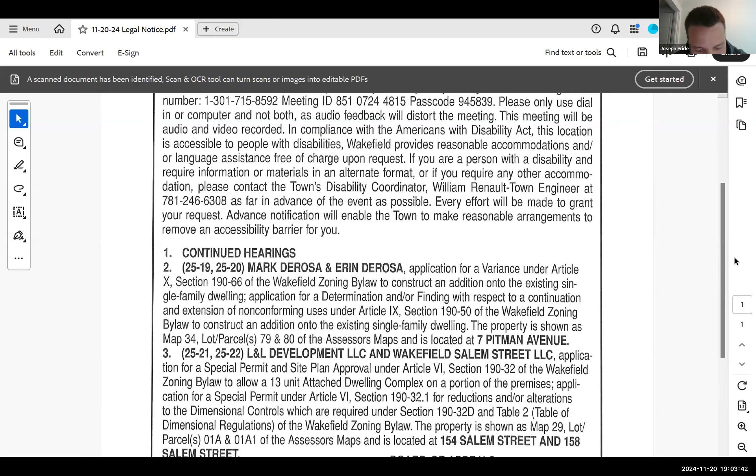Continued hearings. Case 25-19, 25-20, Mark DeRosa and Erin DeRosa. Application for a variance under Article 10, Section 190-66 of the Wakefield zoning bylaw to construct an addition onto an existing single-family dwelling. Application for a determination and or finding with respect to a continuation and extension of non-conforming uses under Article 9, Section 190-50 of the Wakefield zoning bylaw to construct an addition onto an existing single-family dwelling. The property is shown as map 34, lot parcels 79 and 80 of the assessors map, and is located at 7 Pitman Avenue.

Case 25-21, 25-22, L&L Development LLC and Wakefield Salem Street LLC. Application for a special permit and site plan approval under Article 6, Section 190-32 of the Wakefield zoning bylaw to allow a 13-unit attached dwelling complex on a portion of the premises. Application for a special permit under Article 6, Section 190-32.1 for reductions and or alterations to the dimensional controls which are required under Section 190-32D and Table 2, Table of Dimensional Regulations of the Wakefield zoning bylaw. The property is shown as map 29, lot parcels 01A and 01A1 of the assessors map, and is located at 154 Salem Street and 158 Salem Street. Board of Appeals.

Thank you, Joe. As is our custom, we have a continuation in a matter that's also going to be matter under other matters that's not moving forward tonight. Going to read this into the record: a letter dated today, November 20th, from Attorney Brian McGrail, relative to the case at 7 Pitman Ave, case number 2519 and 2520.

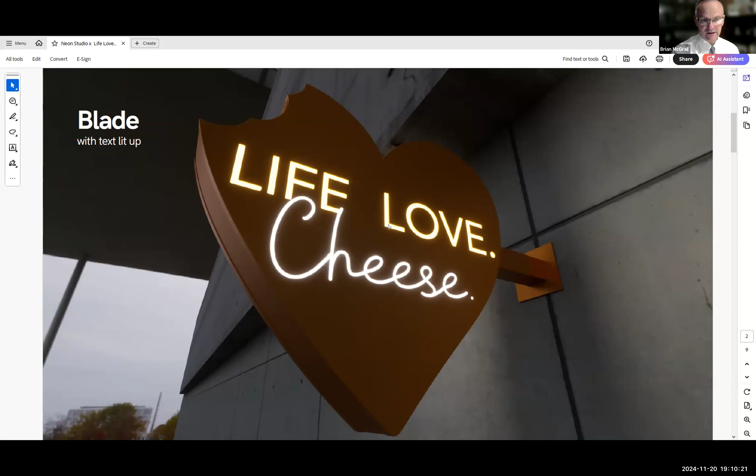The first item we're looking for on the building facade facing Water Street is a bracket sign that would light up. You can see it's got a bite out of the cheese, really unique. Because people go by at a decent rate, instead of just seeing it on the side of the building, having it on the front would allow them to identify and see it if they're looking for this. We'll get into the size as we go on - it's relatively small, only 14 inches tall by 16 inches wide. The sign itself doesn't light up, but the letters do. Savario can show a little bit once I'm done where that would be located, so if you could just place that as a placeholder until we get to that.

This building, if you recall, has two frontages - Melvin Street and Water Street. So under our sign bylaw, it's entitled to have an accessory building sign on each street. When the board approved the project initially, you approved the gooseneck lighting which is already there, so this really fits in nicely. What's being proposed is a simple, straightforward sign, relatively small - only 8.4 inches tall individual letters, and 9 feet long. This will go on the Water Street side and the Melvin Street side with the gooseneck lighting.

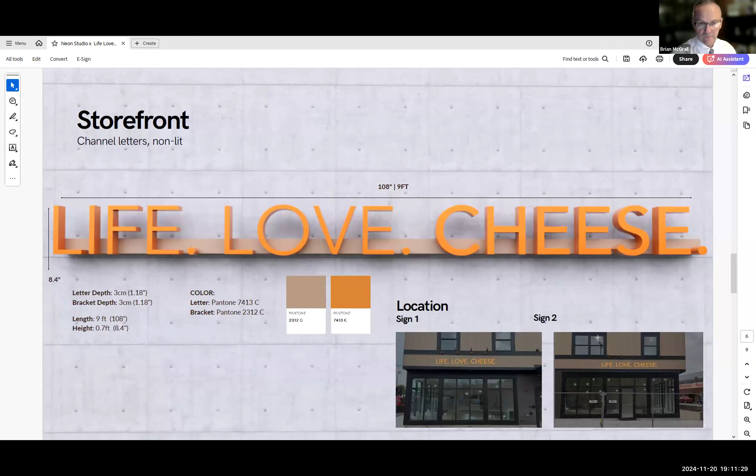Brian, can you remind us how big the sign band is? How deep? Savario, can you unmute? So we actually provided the dimension of it - keep in mind it's not a traditional sign band.

What we've basically done is lined up goosenecks. So this sign is scaled based on the width available from the goosenecks and the light spread of those gooseneck units.

But what is it, Savario, from the brown underneath the window to the brown underneath the sign? You want height, is what you're looking for? Pull up your dimension - your letters are 8.4 inches, yet it's filling most of that space, which is fine. I just want to know what that is. Is that an accurate depiction? It should be, yeah, it should be.

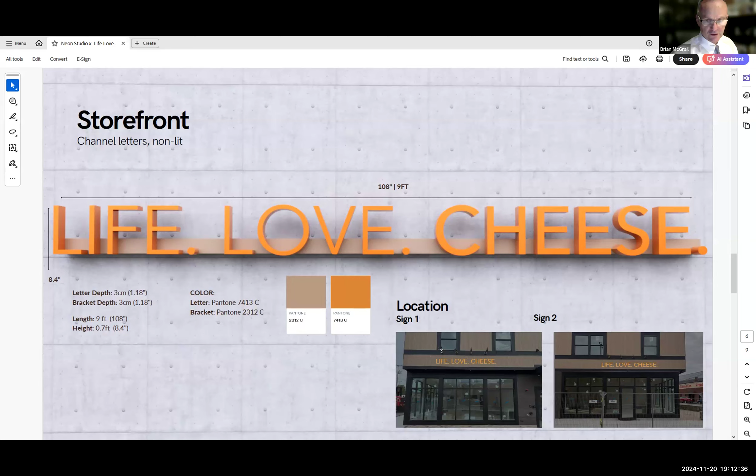I'm going to go on while he's looking at that, if that's okay. Yeah, you can keep moving. So that's what's being proposed. This is kind of just a bigger detail of the letter. As you can see, they're individual carved raised letters.

And this is something we're not looking to do, so that's not included in the package. That would be carved out if you approved it. And that's it on the signage on the building, except for window signs, which I'd like to touch on.

Window graphics. Yeah, go ahead, call it up. I am still loading - just taking a minute, taking this time to load.

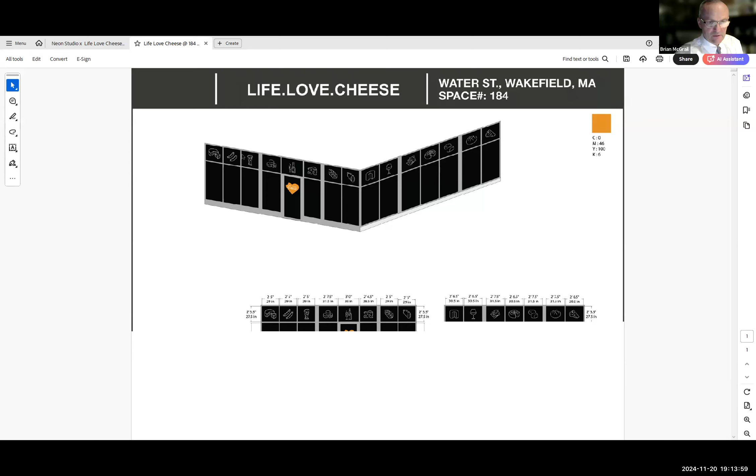So as you know, we're allowed 10% on the windows. What we're asking the board is to consider this an entire window, if you will, and if you do, it's well under 10%, instead of considering these individually. So this is just a detail of what's up above - these meet the 10% requirement, and then the door just has the logo on it with the hours of operation.

What are those up above? Just - are they applied? What are they? They're applied. And are they silhouetted? Are they filling the whole glass area, or are they just like a pen sketch?

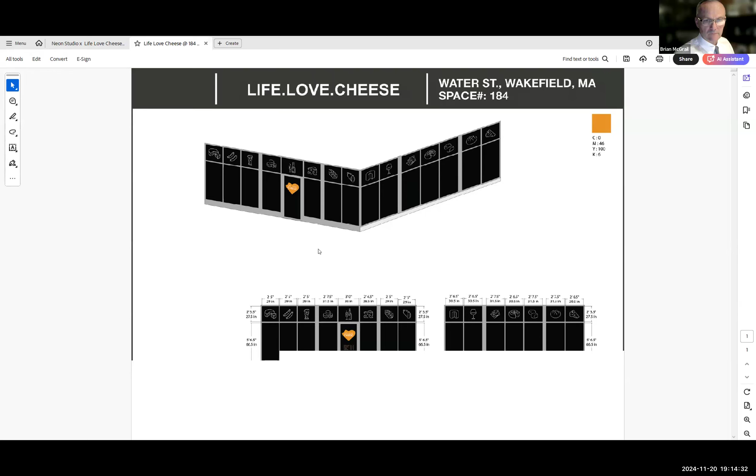Yeah, unless you can bring one up really big so we can understand what it is. Yeah, I can. They're just going to be the outline of these icons - so just the white portions.

So basically like a pen sketch, if that might be the portion closest on the glass. So the glass is glass, not black. Yeah, the black is glass, so it'll be basically an outline - like one's a cheese wheel. So just an outline of a cheese wheel.

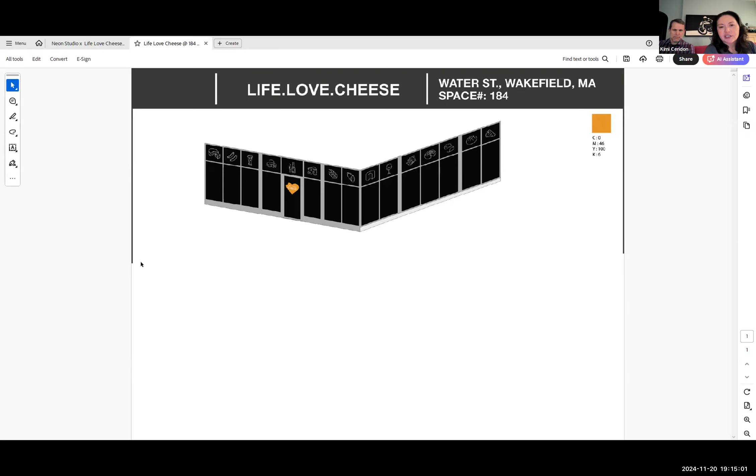There's an outline of a cheese wheel, an outline of bread, an outline of a beer glass, an outline of some more cheese - we're all about cheese. Another cheese wedge, another loaf of bread, a salami, a wine glass. So they're just little outlines that will highlight what products are in the store.

First of all, who's not all about cheese? It's our thing - my motto is eat cheese, be happy. I don't know if you've been by the store. If you have, there's those right now - they're orange with white. It won't be the orange, it'll just be the white portion of that icon.

And that's what they're requesting. Severio, were you able to see those icons bigger, Brian? I'm trying to, for some reason - I know you're trying, but I'm going to try again. Hang on, Chip, well he's doing that, Severio - do you have the answer to Chip's question? Yeah, you know, I'm looking for a set that has it in there, but I can't seem to find something that's going to give us the exact measurement.

So you've got the letter size with me - that you're showing us is 8.4 inches. So it's looking to me, just from a visual, that you've got 2 or 3 inches on top and bottom. I want to say it's about 12, and that's probably plus or minus an inch, I would say. So you think the representation is pretty close? It definitely is pretty accurate.

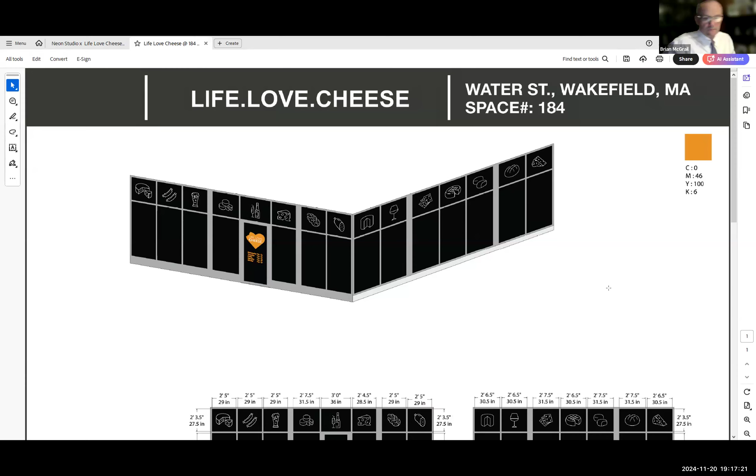And what's below - is that hours of operation? Yeah, oh, the door, sorry. There you go. And how many doors are there? Just the one?

Is it one entrance or two entrances to this unit? Just one door. The other door you see on the front facade is actually the entry to the building, the residential.

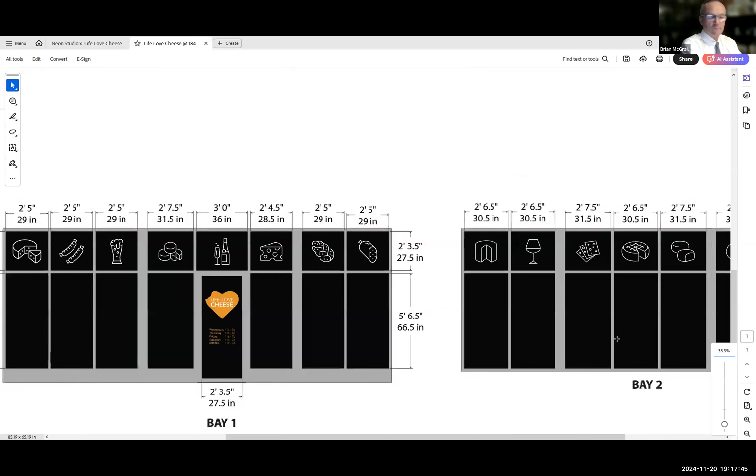I can see the depictions a little better. Is that better, Chip? Yep, thank you, for my old eyes.

Well, first of all, my humble opinion is that this is extremely creative, tasteful, and appropriate for the building because it's kind of sharp and new. The only thing I hope is that this brings huge success to the shop.

Any other comments? You guys were all pressing me for an answer that it was something exciting. Didn't I say that? Yeah, so you were right once.

So any other comments or questions from the board? No, I agree with Chip. Looks good, tasteful, gets the job done. We love cheese, looking forward to having you open your shop.

Okay, Brian, you want to move on to certificate of occupancy then? Yeah, so Severio is ready, his landscaping is done. We're just looking to have a board member designated to go out and do a site visit to sign off for the building inspector.

Okay, I can do that. Unless someone else wants to jump in, I'm happy to do it. My problem is I'd only be able to do it at 5 in the morning or 7 at night. Yeah, those hours aren't going to work for me.

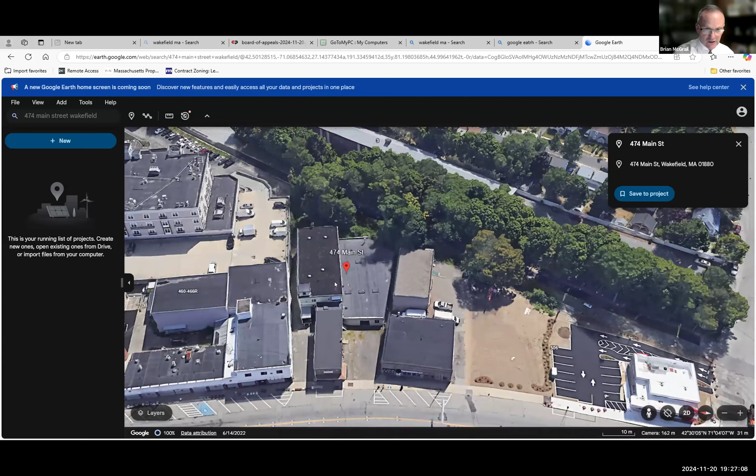You can see this site is made up of this building in the back, and it also owns the loading area in this area. Most of his, all of his customers really are drop-offs. People are just either coming from the middle school or they're being dropped off and picked up out on Main Street. But in any event, this requires a special permit from your board for a recreational type use.

So it will be coming before you, but we did not see any need, we respectfully request that you find there wouldn't be a need for a site plan here, because there really isn't anything to give a site plan of, since it's really just a building. So we're not asking you to opine on what we're looking to do or approve that, but just say, yeah, you can apply for the special permit, but you don't need to present a site plan with it.

Okay, members of the board, any questions, comments? So Brian, the principal use in that building you're showing would be this archery? You're saying it's currently partially warehouse use. Correct. It would change to this other use. Correct. And what's on the left side?

The darker roof here? This is all one building. So part of it was like office within there, and then this was like warehouse. But would all become part of this new use?

Yeah, well, we'll give you the detail when we apply for the special permit, because I don't even know the full details on that, Mr. Hatfield. I just know what they want to do. Okay, but it's for that whole building back there behind Sweet Bay.

Correct. Okay, Brian, what's in the front? Is that just the loading zone? Yeah, this is loading right here, Joe. What about the other side? Is that part of it? Same thing, these things are connected. I'm assuming you'd be cleaning that up or just leave it? This property is going to get redeveloped probably in the next 2 or 3 years.

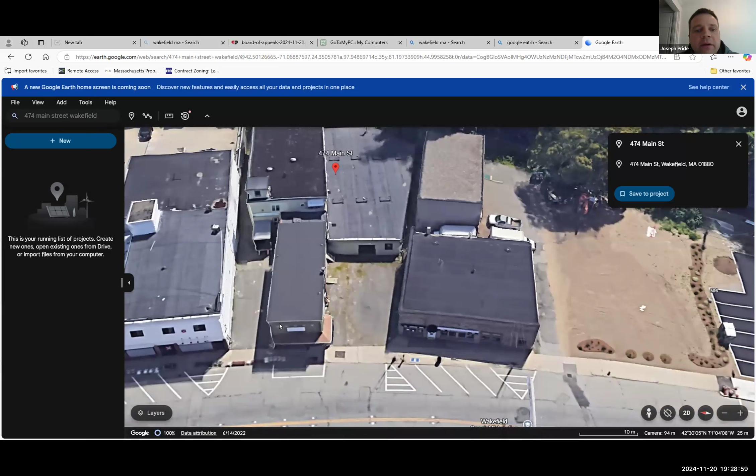So what's that thing in the front? Is that part of it too? That's Sweet Bay, it's its own individual lot. How this ever got developed back in whenever it was is amazing, but it did, snuck in there. It'd be nice if this kitchen place was all part of it. The kitchen place on North Ave is moving into Blanchard's.

So that other building on the right, unrelated, but just a quick aside. Saw that in the paper. But makes sense to me.

I don't see the need for a full site plan review on this, Mr. Chair. Anybody else? No, I agree, they're coming back for the use special permit, so I really don't see why we wouldn't do this. If they're not changing bathrooms, changing none of the infrastructure, I'm good.

All right, let's get a motion, then let's keep moving. So, Mr. Chair, I move that we waive formal site plan review for the proposed use at 474 Main Street. The applicant will come back for a special permit, but we waive the need for a full site plan review as part of that process.

Seconded. All right, motion's been made, seconded. Any further comments or questions from the board? Seeing none, regular voting members: Dave, yes. Joe, yes. Chip, yes. Mickey, yes. I vote yes too.

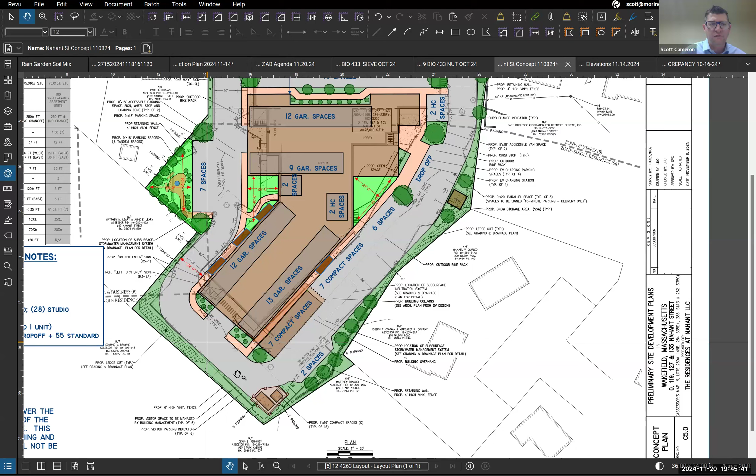We've put this in an area as far away from everything as possible—adjacent properties and the subject building—in an outside location that would be fenced in. This allows for an easy pickup opportunity and exit out. It's also a larger space, so less frequent pickups will be needed with this setup.

There'd still be two garage access points, one to the front portion and one in the rear to get to the interior garage spacing. We're still proposing some compact spaces for efficiency. We are providing handicap parking spaces, and we had a drop-off before—we still have a dedicated drop-off right at the main door. We do expect to allocate visitor parking spaces; we haven't fleshed out exactly where and how many, but we anticipate having some dedicated visitor spaces as well.

The transformer visually from the street is still in the same location, tucked into an area where it will be concealed on all abutting sides. There's a pretty good elevation change there, below the adjacent properties.

Through the middle of the property, these brighter green areas are open space that we can plan for really any number of things to service the residents of the building—sitting areas, park areas, a dog play area, passive open space opportunities in these bright green spaces, which we didn't have much of before.

In total, the unit ratios: 8 three-bed, 14 two-bed, 30 one-bed, and 28 studios. We're a little heavier on the smaller side. Stefano will get into that in a moment when he presents the building information.

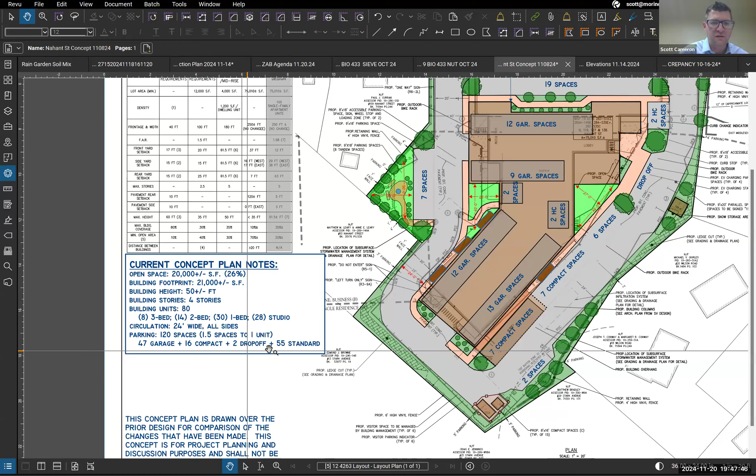We've removed a story from the building—the prior plan had 5 stories, this is all 4 stories, so we've reduced the height of the building. The building footprint is smaller too, down to 21,000 square feet. And again, the parking ratio is about 120 spaces—we're expecting 47 plus or minus garage spaces and the rest on the surface. That's a 1.5 parking space to unit ratio.

It breathes a lot better here. Obviously, we've reduced the density from 100 units down to 80 units—that's the big change, a 20% reduction. That really helps us breathe a lot better.

So from a site perspective, again, this is a concept plan. We really wanted to target the areas of concern, a lot of which had to do with traffic circulation and how tightly designed the site was before. I hope what you can see here with the green, the openness, and the positioning shows that we've accomplished a lot of those updates to make the project fit better.

I think maybe I'll turn it over to Stefano at this time so he can show you some 3D representations of the property and what this looks like now versus before. If that's okay, if you're ready for that, Stefano. Sure thing.

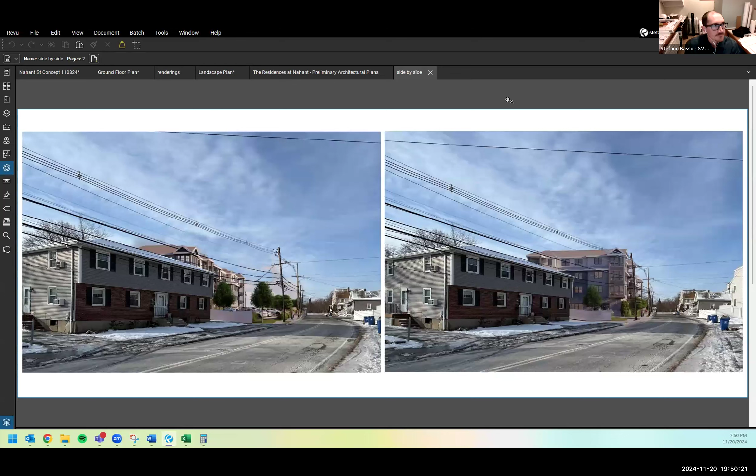Can switch over to the next one. So the view heading away from downtown, looking east, you can see the same effect. Current proposed on the left, previously proposed on the right. Again, with the smaller setback on the right, the building is visible in front of the adjacent home on this side too. You can also see in this view the fifth floor on the view on the right. The fifth floor was originally visible above the roof line of the adjacent home.

So with the fifth floor going away, you won't be able to see that anymore either. The front portion of the building is 4 stories, so now we've maintained that height back across the entirety of the building. From this point, probably 3 lots down from the property, the building's barely visible from the front. You do get little peeks of it between buildings, depending on where you are on the sidewalk or on the road, but it's largely obscured.

This layout also allows us to potentially add some more plantings. So that's something we can look at in terms of design, where plantings are appropriate, type of plantings and screening. That's the kind of detail we look forward to getting into in more conversations.

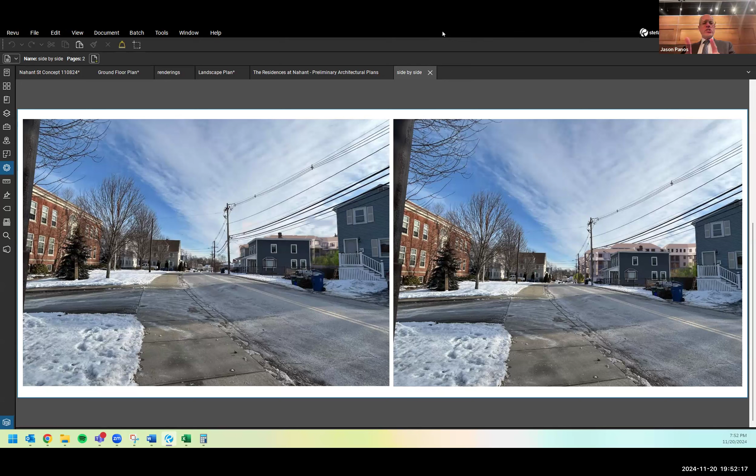Board members, comments, questions, reactions? Mr. Chair, Mickey Feely. Obviously we're waiting on the TAC interpretation of the changes. It's still too big. I appreciate that you took a floor off, that you've moved it back, and that you've taken 20 units off, but I just think it's too dense for this site. Okay, thank you. Anybody else?

Where are we with the parking? Did you mention that? Now that you went down to 80 units, I'm assuming you have a lot more parking spots. Yeah, the ratios went from 1.3 to 1.5. Oh, so you've got to the 1.5. All right, I mean, I appreciate you moving it back. I like the fact that you shrunk it and moved it back. You're at 80 units now. What was the very beginning? Where'd you start at, 120? Just curious. During the MassHousing process, yes, 120 went down to 100, which was what was actually applied for to this board, and now we're down to 80.

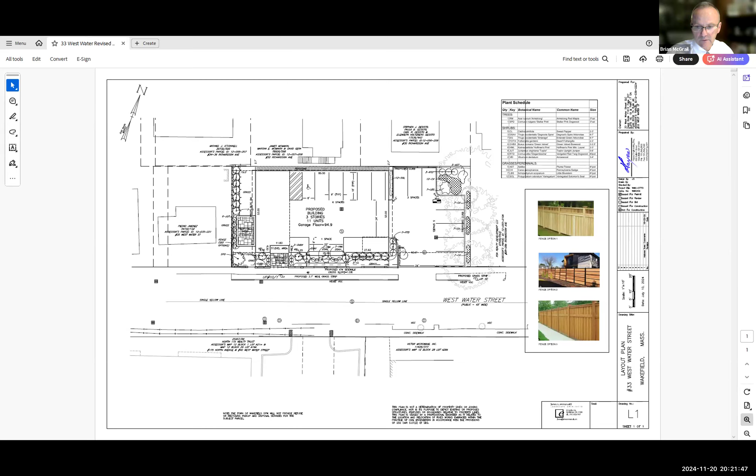So, Brian, if I can jump in for one second as well.

We talked, the neighbor to the right is concerned about these big trees, and we looked at them. It's almost tough to tell from the ground exactly whose trees they are. But we did determine that they could stay given this design, and that they would be protected from construction, so the neighbor's concern was that they didn't get taken down. I think that can be adhered to. And then we talked about both streetscape and this protection on the side for this public area. So that's what was discussed.

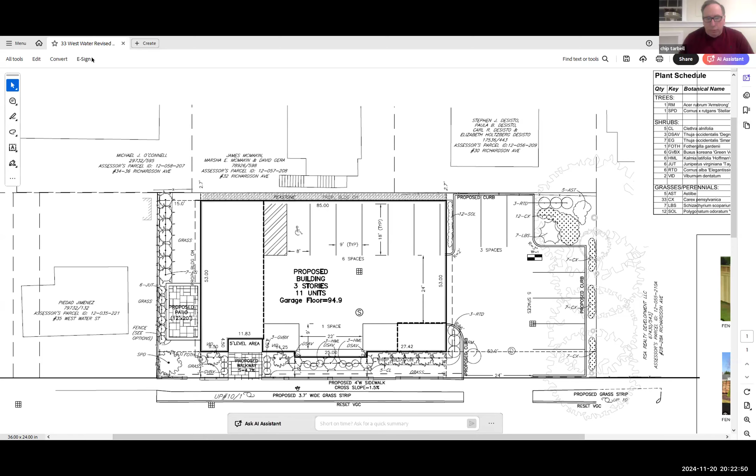You can see the big trees to the right silhouetted there. And then in a condition or whatever, if this was to move forward, we would see a whole designation of protection and how to handle that. That's all I got.

So if I could continue on, what we've got is the proposed patio now to the left side of the building. We've reduced our parking count by one, which we talked about, which the board thought there was value in doing, especially considering the proximity to the train station here. And we've put a really good buffer of landscaping. That's what the board wanted, and we had Jim Emanuel take a look at this. He's revised the landscaping plan to put a variety of shrubbery and plantings in here.

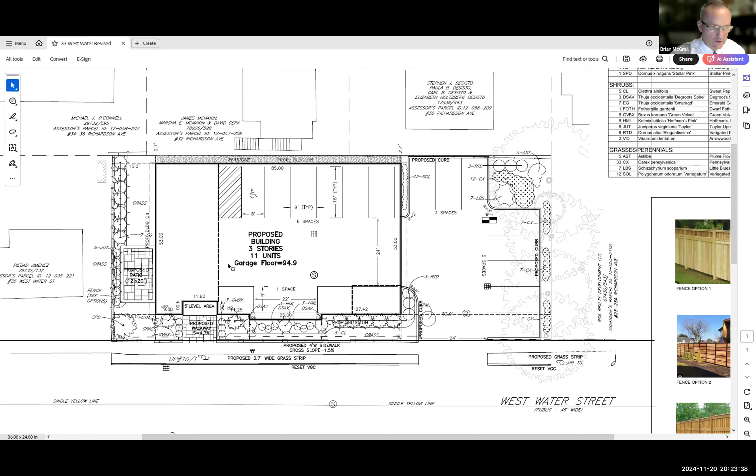The board had also said, maybe consider a fence here, but not like a typical white vinyl fence, maybe something that really fits in nice. So Jim came up with three different options. I kind of like option 2, these would be wood fences, and they would really fit in with that landscape area without having a stark impact on anything.

But what the board also wanted to know, I think you saw some potential value with this open space, and I think Mr. Hatfield had asked how it's going to work with the building, so residents are able to readily access this area. So with that said, I'm going to hand it over to Andrew Jones to go over that. Yeah, please do. Great, Andrew, can you take it, please?

Absolutely, thanks Brian. Good evening, board members. Andrew Jones, representing Phoenix Architects. Let me pull up the plans. Something weird is going on here, give me one moment, I don't know why it's doing that. Okay, here we go.

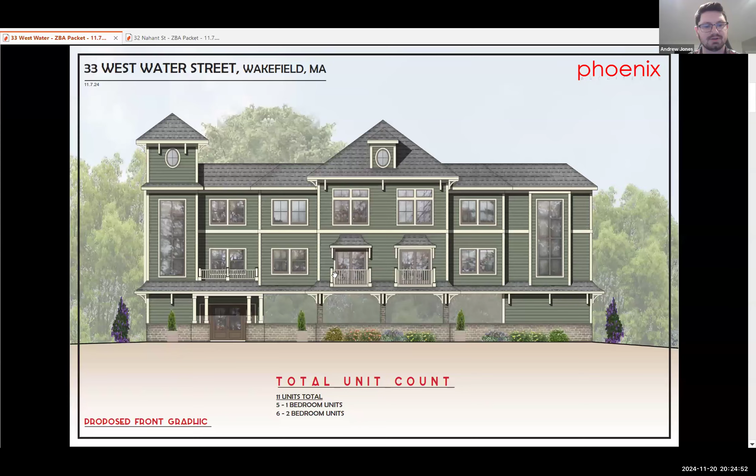So, as you can see, unit count stays the same, front rendering stays the same. The biggest adjustment was the building shift, showing the building a little bit further away from the existing home to the left-hand side. This context study stays the same.

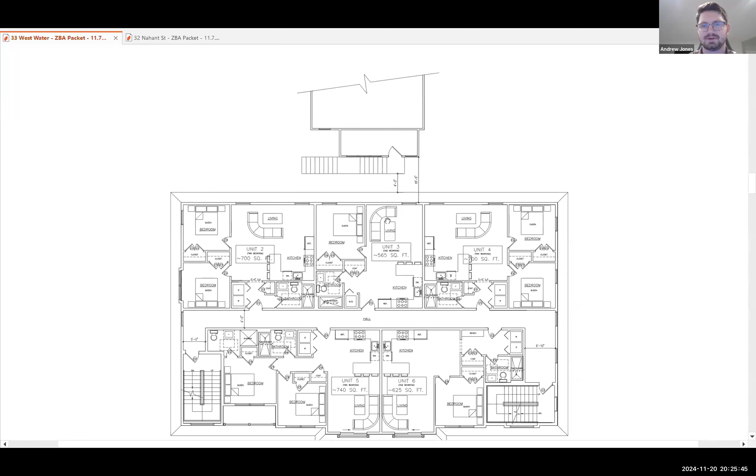I'm going to go to the next page. This is something Kazumi had brought up. This is a second floor plan, looking at that rear house in the back and window alignment. We spent a little time adjusting some of these windows so it wasn't a clear view from one of the units right into this area. We really tried to push unit 3's windows to the right-hand side and the left-hand side to avoid direct eye contact, and also started looking at furniture layout and stuff like that to avoid those issues.

On the first floor, as Brian was stating, with the new patio here, there were some adjustments to the hallway just to get a direct exit out to this new amenity outside. So we carved in a new hallway, and then we also readjusted unit 1 based on this new hallway to make sure everything's working and complying.

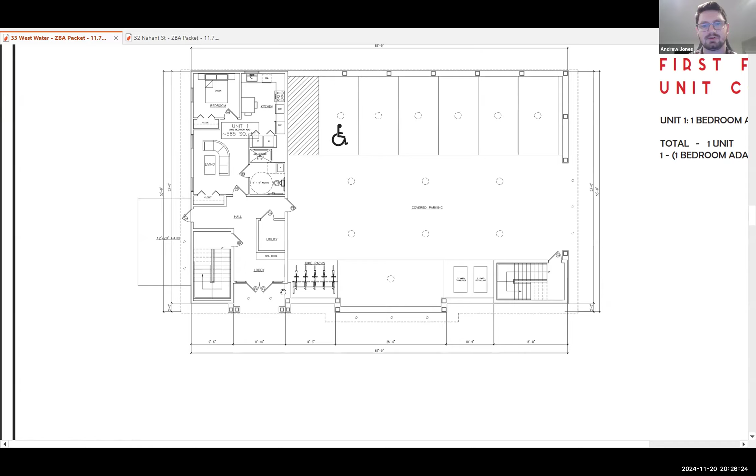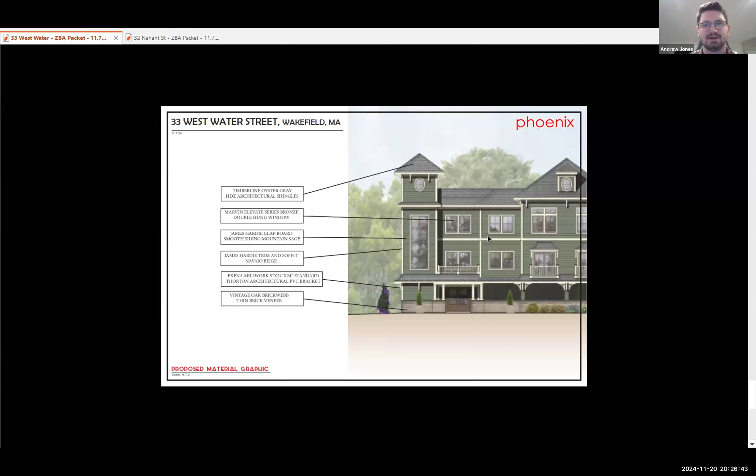Besides that, as you can see, these small circles, the one other thing we explored is showing exterior lighting. There's two types of lighting. I'll go to the last page first so you can understand the two differences: one being a recessed 6-inch canless lighting fixture, and the other being McGraw Edison 5500 lumen parking garage flush lighting. So I'm going to go back to the first floor to show the thoughts on this.

There'd be 2 of the 6-inch recessed lights in the front entryway just to light up the building from the front a little bit. We're showing 3 recessed 6-inch lights in the center here.

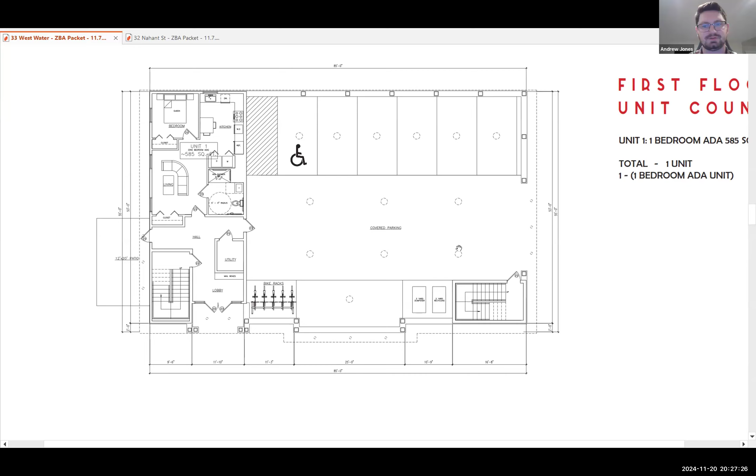Then we're also showing 3 6-inch recessed lights over the front of the parking garage. Besides that, that's when we switched to the other parking garage lighting. So as you can see, what we try to do is 1 per parking space, 1 up here as well, and then 6 total just within the drive of the parking garage.

So that's really it, besides that not much has changed. Elevation's all the same. As I said, we did shift a couple of these windows just to not have direct view out to the house in the rear. And that is it, I'm happy to answer any questions you guys may have.

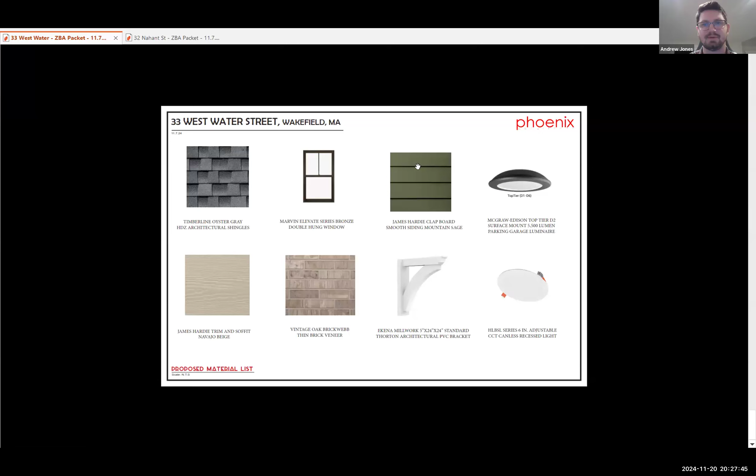Andrew, how's ventilation in the parking garage happening? It's just gonna be natural, there's enough penetrations. So where are the penetrations? In this elevation, you can start to see there's 1 right here, 2 right here, basically wherever these columns don't fall. I'm gonna go to the floor plan.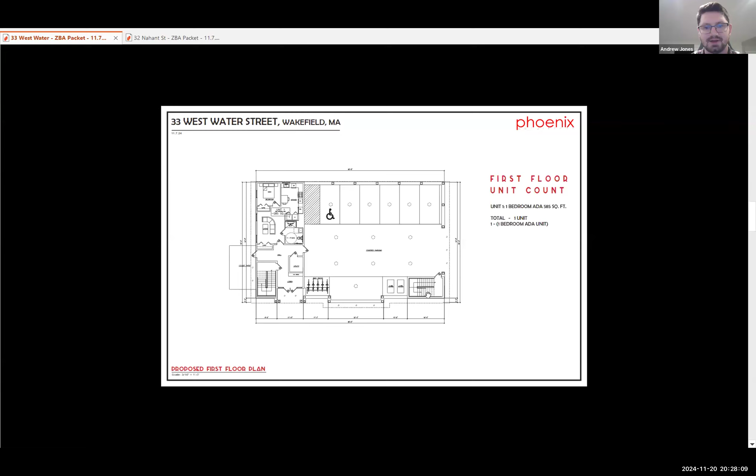What are those? I mean, I can't tell from your elevation. Are they louvers? Are they faux panels and screen? What are they? Nope, it's just columns. There's the base, which is the brick veneer, and then it's just open between these columns.

And what about in back? Same thing, so this is an open opening, just open space to the neighbors. Yes. Can you show that rear elevation and front elevation again so we understand that? Yeah, because it doesn't show well.

I understand. So right here would be an opening, that's just all open. And as well in the front is just open. Open, open, open, open in this transition.

So people see tops of cars, roof racks, ski packages, and then at night, if the lights aren't controlled well, they get spill of light out of that. It is open, correct? Okay.

Is there any option not to be open, or to fill it with screening or somehow disguise it? To me, because you'd be looking through, that almost would look like the top 2 stories are sitting on pillars, and just open underneath, almost floating there. It doesn't seem to have a whole lot of substance - I guess I didn't understand that before, so I apologize for bringing it up late, but it doesn't seem like there's a whole lot of substance to the top 2 floors and the bottom. If I look at that elevation, other than the doorway, it doesn't look connected at all.

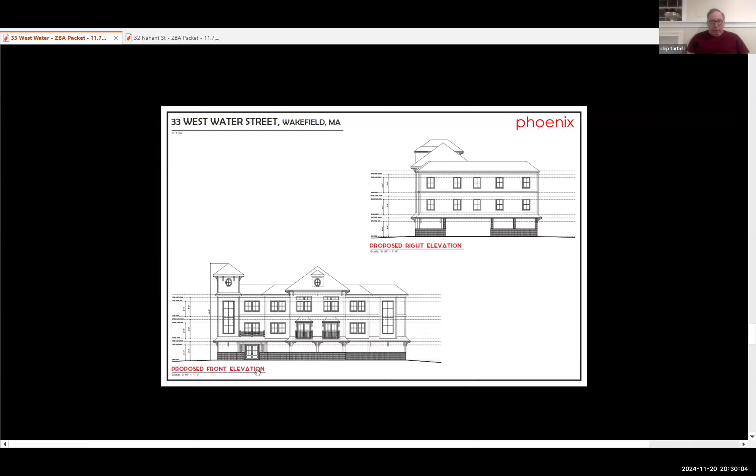So what we can do is start to add siding, and we can definitely look at doing some sort of louvers or screening here for sure. One thing to know is the stairwell right here is covered, this isn't open. This is also the stairwell, so that's covered.

I think we definitely need to understand this better. Yep, we can definitely represent that better with maybe adding some siding in these elevations so you can fully understand what's open versus not. Faux windows, something - because at this point, those top two floors, now that I understand it's open, just seem to be floating in midair.

I agree, Chip. And again, isn't it a safety thing for the residents? I think these multifamilies we typically do, it's somewhat of an enclosed garage with a door, and there's safety for the cars and people just coming up and helping themselves.

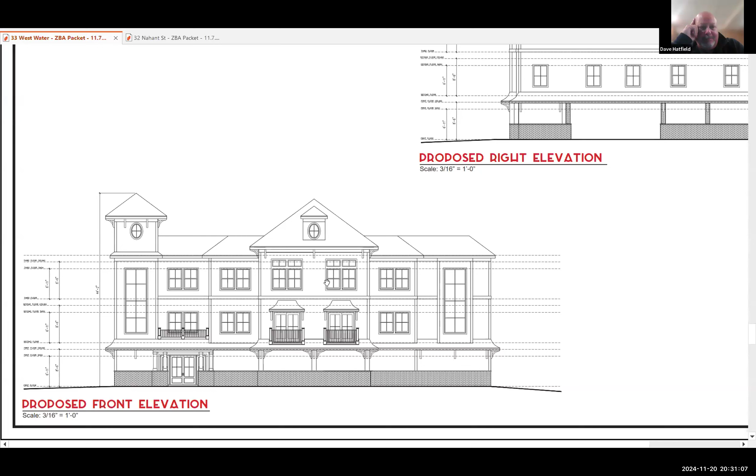Can you go back to the colored, the green version we were looking at? Yep. I wasn't getting it either - those look green, those look filled to me. I didn't get it either, Chip.

This looks like an elegant project, and now that I know that's just see-through, looking at elevator shafts or stairwells, it's not. Well, the stairwells on the right are covered. What you're looking through, you're not seeing green, you're seeing people's car tops or the house behind. Right, those are trees or something, they just happen to be similar green. Yeah, whatever the render shows.

Which aren't there. I'm disappointed more than anything else because it looked great when it was green. And I agree with Chip. I think we can definitely go in and fill that more, look at a louvered system or something so it feels fuller and the view through it won't be as extreme as it is right now.

And even the entrance where the cars drive in, do you want to consider a door for safety and privacy? Just something to consider, right? A lot of these have something like that. I don't remember one - have we done one where there's sort of open parking in a multifamily?

No, it's always had screening. I think there are some in town that are open, and I think this is definitely more open than some. Think about Galvin across the street - Bennett is very similar, has louvers and an open system, I don't think there's a door, but it has a louver system. It's louvered, not wide open, but similar to this, but it's screened.

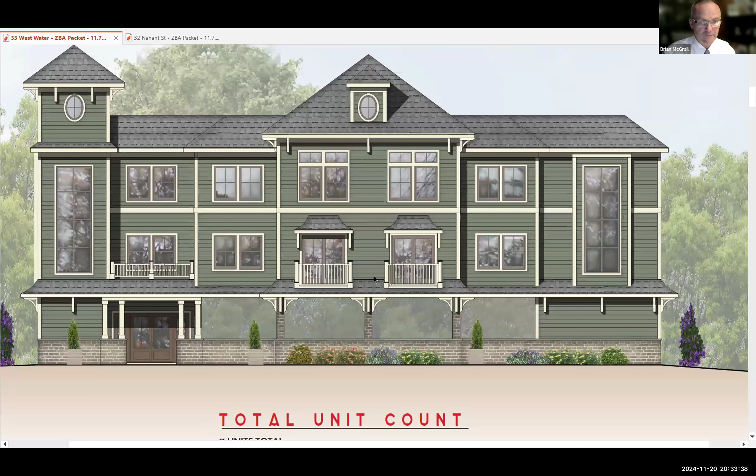I'm sorry to bring it up now, but I really didn't understand it before. Thank you, I think it's a valid point, and you don't need to apologize. I always try to be honest. When you look at the green down below, as Mike Feely said, you kind of can't tell. So we'll look at that - it's a point well taken. Andrew, you probably said it in a previous meeting, it just didn't resonate. I don't think we got it because you really can't tell. Appreciate if you take a look at it.

Absolutely, point taken. Let's let Kasumi - she's had her hand up, let her weigh in. She's too polite, Tom, obviously.

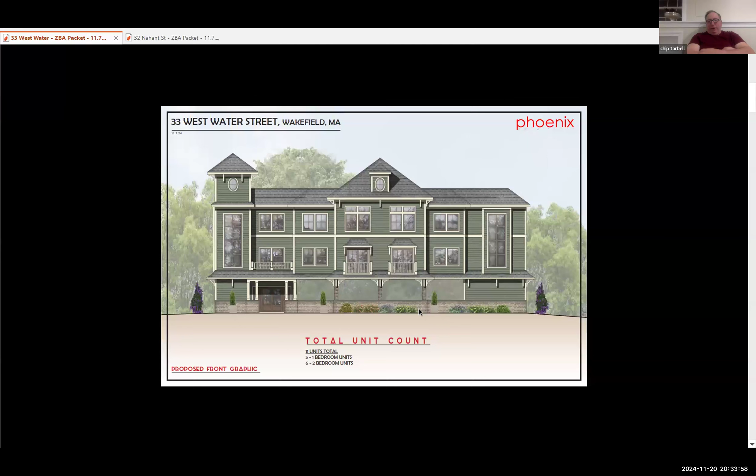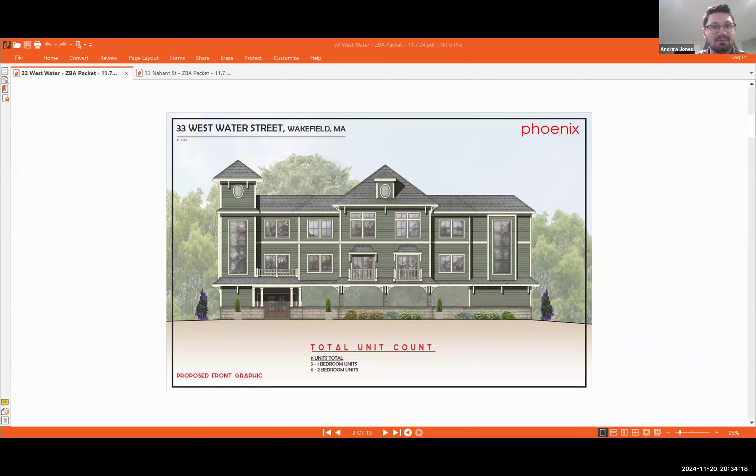Thank you. Chip just reminded me, is there any columns in the garage area? I don't think I see any columns. We have not structurally gone through the structural engineering of it, but there may be some that fall through. Obviously we'll make sure they're not protruding 6 inches more than typical in between parking spots. It's still something that needs to be structurally engineered, but if they were to fall somewhere, I'm throwing out some areas where they'd probably land, which is within this aisle. I think you just need to know that. We can throw some in just as a rough idea of where they'd land, but until we get this structural engineered, it's kind of just a guessing game. That might make it difficult for the cars coming in and going.

Anyway, thank you for looking at the windows on the second floor. That looks better - makes me feel better. Absolutely.

So that ADA unit, can you just move the toilet so it's in the correct position? It should be 18 inches away from that wall that has the grab bar and the toilet paper holder. Yeah, we can look into that. I believe it's 18 inches - just minor things there, but yeah.

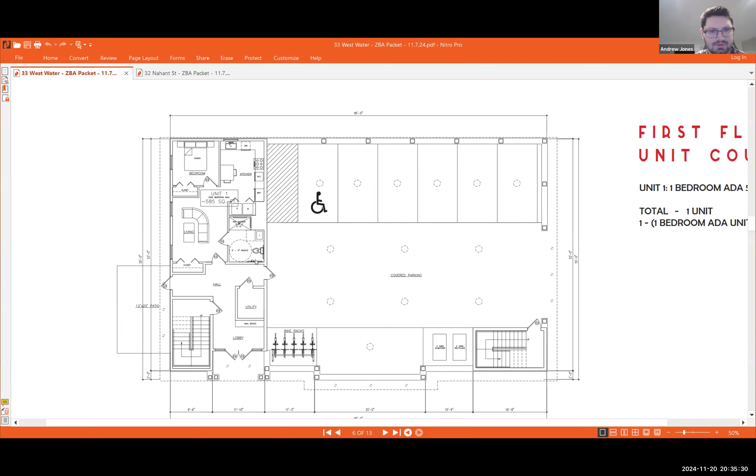And then the garage lighting - I don't think you need that many lights. Those are really high illuminate lights, usually spaced like 25 feet apart. So you might want to look at it, or ask the manufacturer how far apart they should be for the spacing. I think you have too many.

And then another comment I had is on the parking outside, on the top right corner - it looks like if there's one car parked facing east, I don't know if you can fit into the spot facing north. I don't know if you can bring up the site plan. I don't have it, Brian. You want me to swap it up real quick? Can you see it? I tried to bring it up.

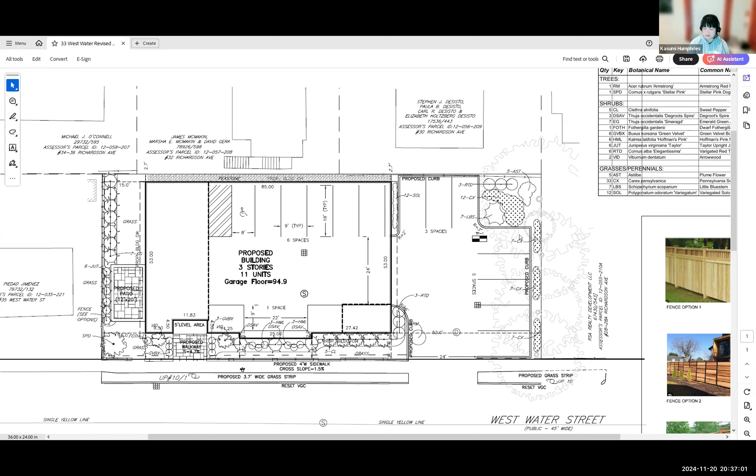So where you have the L shape, the bump out, you have 7 LBS 12 CX - this one. So if somebody is parked on that spot, you have the arrow. Can somebody else park on the one below, looking towards the big trees - this one? If somebody's parked, they both parked, can either of them come out from the parking spot? I think so.

There's standard size spaces in 9x18. John, did you make it on here? Yeah, they're standard 9x18 spaces. There shouldn't be any problem in terms of maneuvering. In the aisle width that they have to back out, it's 24 feet in this area. Obviously it's a little bit more as you get towards the garage, so there's plenty of room for them to back out and head out towards West Water Street.

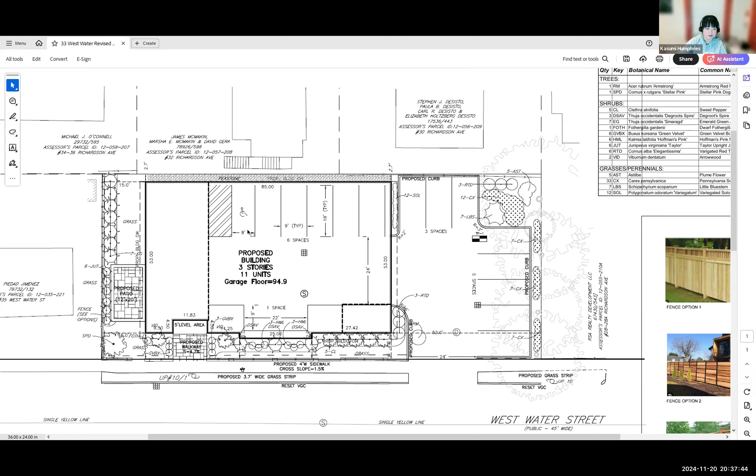Okay, yeah, it looked kind of tight. I just want to make sure. Thank you. Any other comments or questions from board members?

Well, if people are feeling good, there are a couple of to-dos, right? Certainly looking at the garage and so forth, but if folks are feeling like this is moving forward, we should probably touch on a couple of things at the next meeting, Brian, if you can. You probably need a small O&M, and think about the conditions around the tree protection that Chip mentioned, how you might memorialize those.

Anything else, board members? We would need paver selection in the package for the patio. We would need a fence selection if we were going that far. And I mean, yeah, we should probably decide or make a recommendation. Don't be polite, just jump in.

Yeah, Kirsten, go ahead. I know I've missed a couple of meetings, but in the beginning we had talked about a shadow study for the impact on the neighboring home. Was that addressed? And that's why the building was moved to the right? And is there still a concern of the impact?

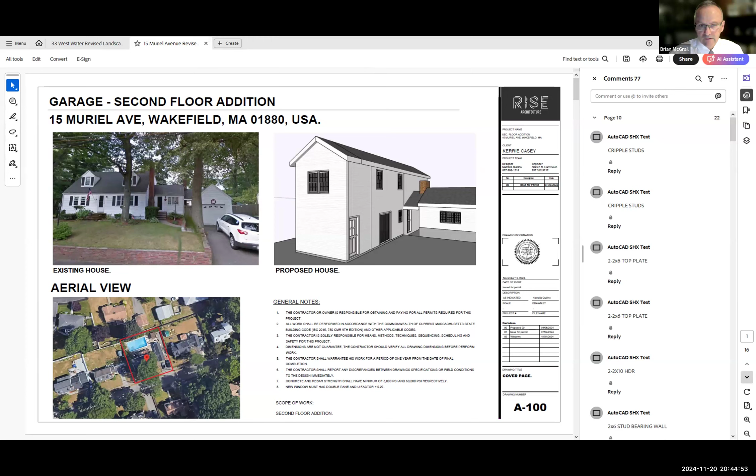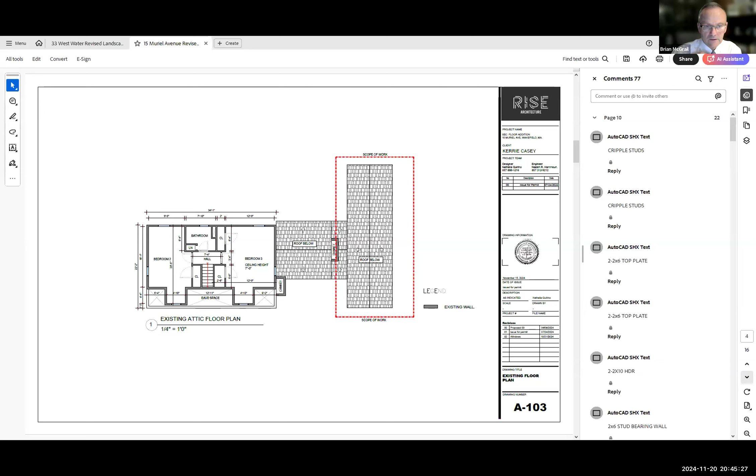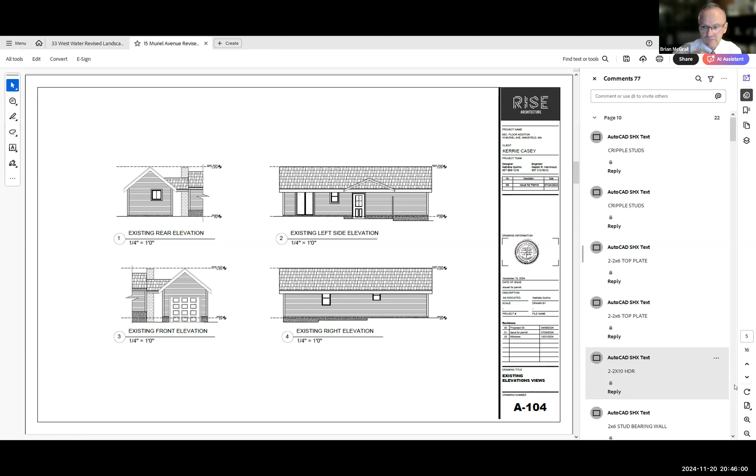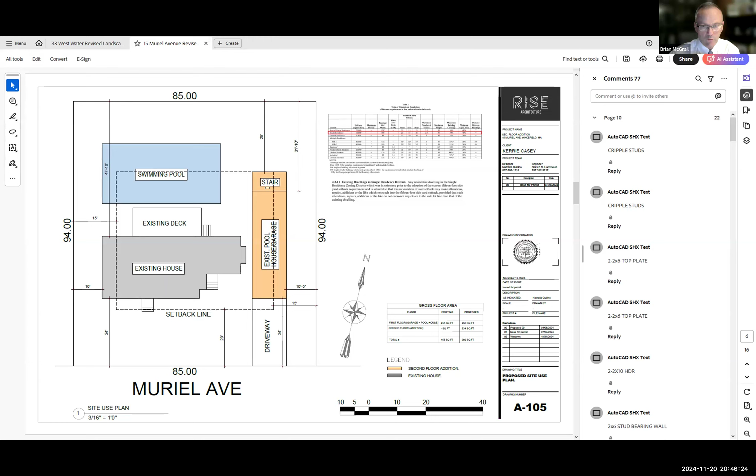What's happening here, and you'll see it on the site plan, this area where it says stair is an addition to the house. That's because the building inspector, who we've met with, wants the stairs that provide access up to this within the house—he does not want them on the outside. He's requiring that.

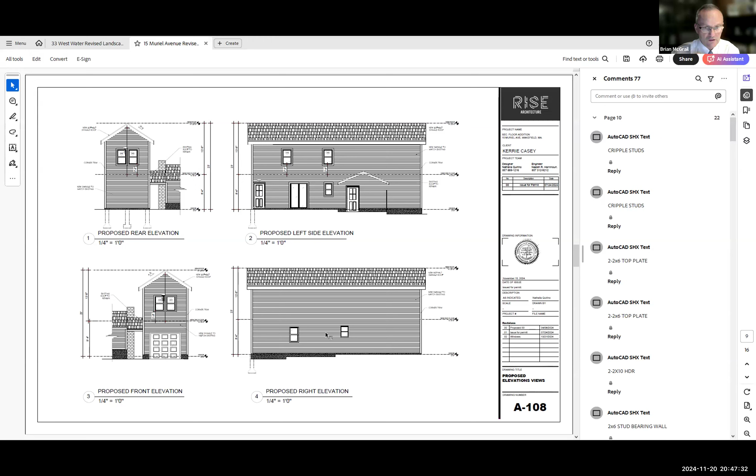So this is the elevation with the addition. This is the front elevation, as you can see, and up above is the rear elevation. This is the elevation facing the other part of the house where it connects, and the bottom right is the elevation facing the neighbor to the right. Note that there are no windows being proposed in order to preserve some privacy for the neighbor on that side—where the living area is up above, there'd be no windows on this wall. These two windows are in the garage; they're already existing today.

And these are just really not relevant—these are more building permit related, but that gives you a flavor. Now let me share the site plan, if I may, to show how this lays out.

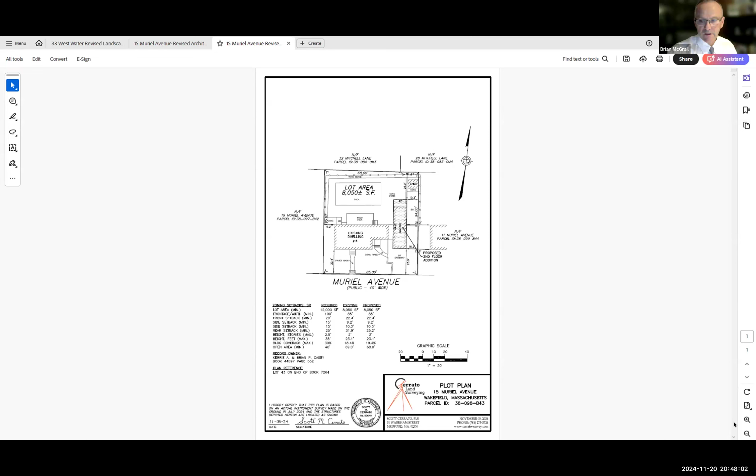Okay, so this is the site plan. You can see the existing conditions with the garage, and this 12-foot, the dot is where the addition would go.

Please take note that the setback currently is 10.3 feet, and the addition is going to match that. So that's why we don't need a variance, we just need a determination or a finding. We also took a measurement from the neighbor's house to make sure that we comply with that component of the bylaw.

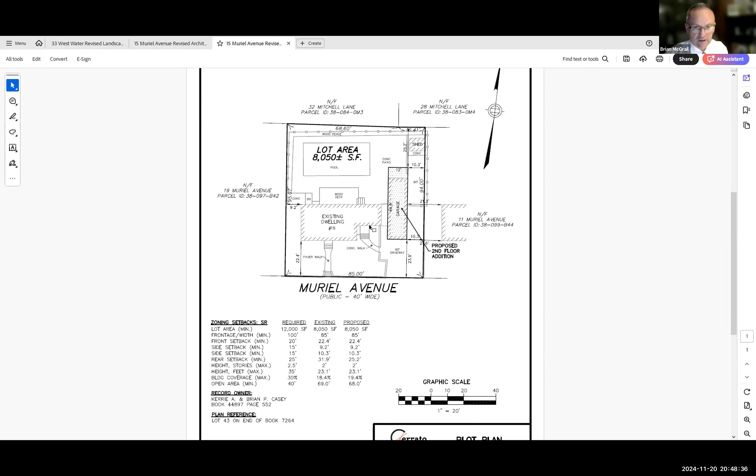It's 21.2 feet and 21.6, so it meets the 20-foot requirement for separation. As far as the nonconformities go, the lot area required in this single-family residence district is 12,000 square feet. This is a legal nonconforming lot at 8,050. Frontage required is 100, again legal nonconforming at 85.

Front setback is 20. It meets that requirement today and will continue. There's no change in the front setback. 20 required, 22.4 from the front. Side setback on the left side required is 15.

It's currently 9.2, and that is going to stay the same because nothing's happening on that side. On the side to the right, again 15. The existing is 10.3, the proposed is 10.3. So once again, no change.

That's why I think you could just do this with a determination, but I always request the finding aspect too as a belt and suspenders. Rear setback 25 feet. It's currently 31.9. It will be 25.2 with that addition, but it meets the current zoning setback requirement.

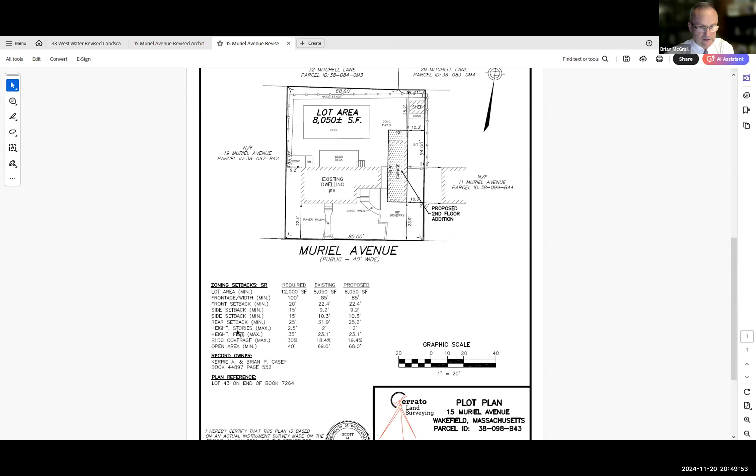In height on stories, 2.5 are allowed. The existing is 2 and the proposed will be 2, so it's actually below the number of stories allowed in that district. And the maximum height in this district, 35 feet is allowed. The existing is 23.1, and it will be the same.

Building coverage required is 30%, existing is 18.4. 19.4 is proposed because of that addition, but again it meets the requirement. And open area required is 40, existing is 69. It will still be at 68, which will comply. So that is the zoning table.

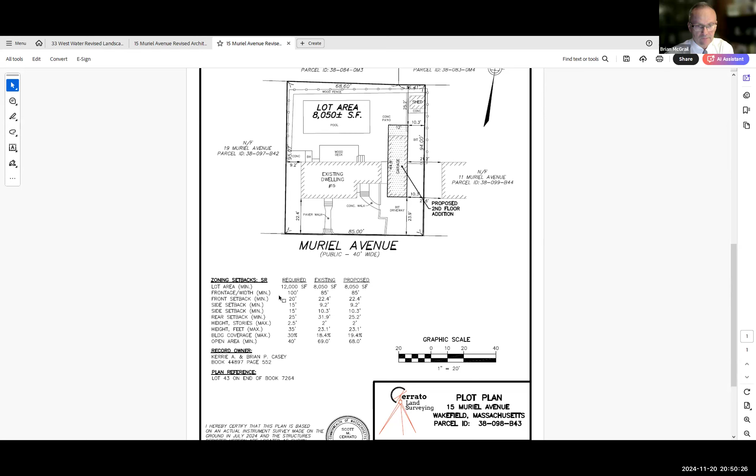Brian, what's the date of this plan? Because this is not on the package we received. I sent this in on Friday, Dave. Did I miss it, Mr. Chair? Did everyone get it? I got the revised architecturals. Did I miss the site plan? I have it, dated 11/5/24. Yeah, okay, I must have missed it. Okay, so we do have it with the zoning table. Okay, November 5th, thank you.

And the big news, Dave, is that there's no exacerbating any of the non-conformity, so it's pretty straightforward. I just want to make sure I got the right plan. I'm contemplating what's happening. So I would respectfully suggest that what's being proposed does not increase the non-conforming nature of the structure, and even if it did, it's certainly not substantially more detrimental. I would respectfully request the board to make that finding.

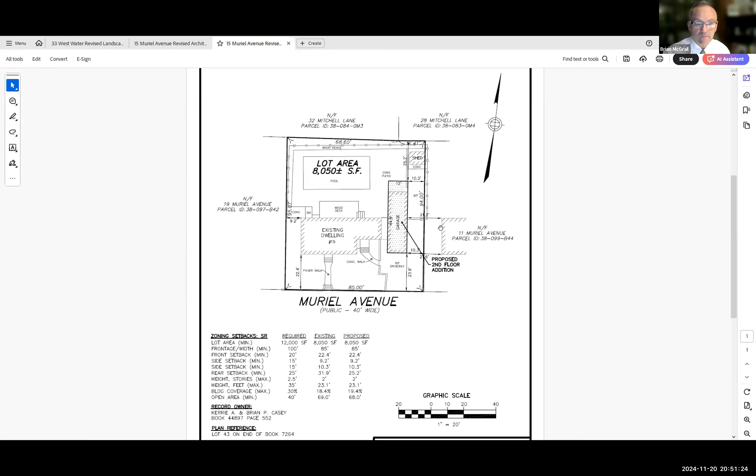All right, board members, questions, comments? Yeah, my comment would be, Mr. Chair, that this is a pretty straightforward finding. Specifically, more importantly, that they took thoughtfulness to not put any windows towards the neighbor's side, so that even the height doesn't make it fail for the finding.

Findings are pretty low bar, and I think as Mr. McGrail has walked us through, there has been no greater exacerbation of the non-conformity. So I think this is pretty straightforward. I'm in favor of a finding. And they gave us a lot more information than they normally do. All we really need is that zoning table, quite frankly, but it's appreciated that they shared more.

Anybody else? Agree, pretty straightforward. Appreciate the info, just so we can understand what's going on the site. I'm good, looks good, okay.

All right, hearing no more from the board, I am going to open up for public comment. Is there anyone here from the public that wishes to testify regarding this application? If so, please use the raised hand function in Zoom. And I'll try my best to find you. I see Ted Dooling. Ted, you're on mute, if you could unmute yourself.

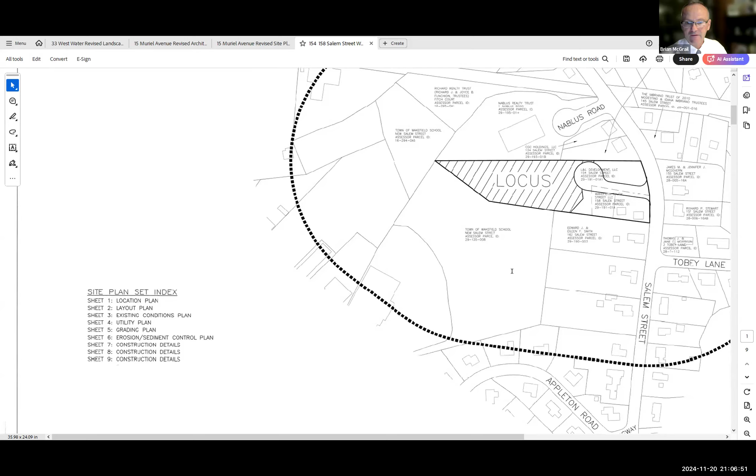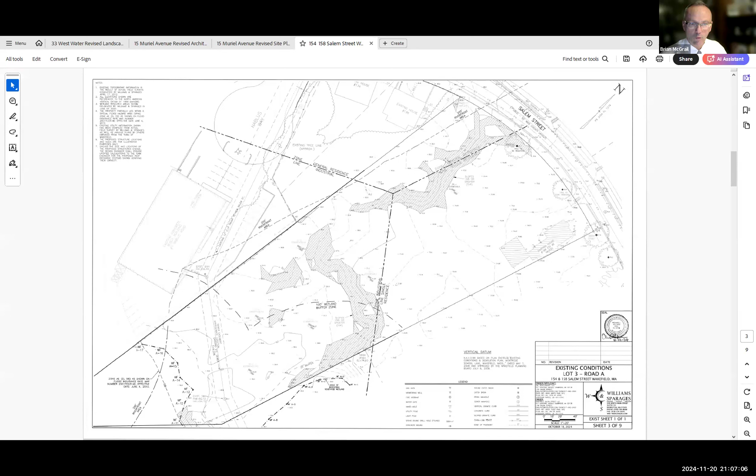The interesting part of this is it's a split. These 2 lots, 154 and 158 — this is 158 with a house on it, and kind of this is the lot line. 154 is vacant land. Take note that it's a split zone lot. Part of it in this area is general residence, over here is single residence. And out back where this kind of V is, where the project before you for your jurisdiction, the attached dwelling complex, is in the industrial zoning district.

So I thought it might be helpful to lay that out. The reason the planning board is involved in this project, which is unique to you, is because we're putting a roadway in. This roadway A comes in, and this will actually create the frontage. We're actually creating 4 lots.

We're creating lot 1 where the 2-family house is, lot 2 where a house will be built, and lot 4 over here where another house will be built. Then we're creating lot 3 out back, which is where we're proposing the attached dwelling complex of townhomes, which is the jurisdictional element of your board. So the planning board has jurisdiction to put the roadway in, approve it, and create the lots, and your board has jurisdiction on permitting the attached dwelling complex on lot 3 in the back.

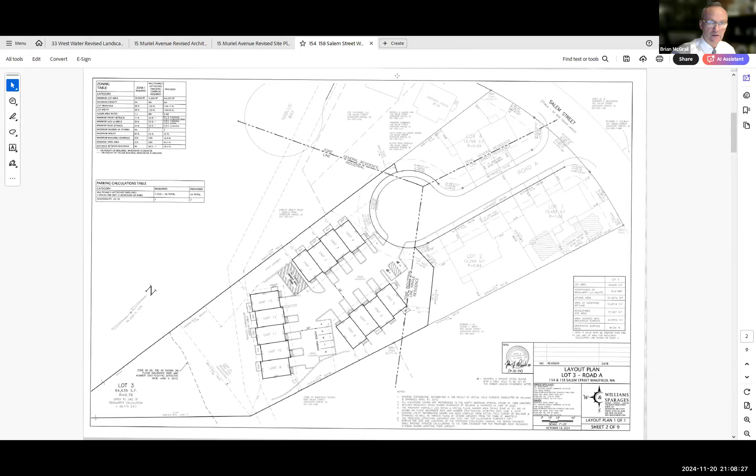So I'm going to switch to another plan that will depict this a little bit better, more fully.

And Rich will get Brian into this. The other lots wouldn't be our jurisdiction because they could be developed by right. That's right, yep. It meets setbacks and all the dimensional requirements.

Now the town planner raised an issue on lot 1, because this is 158, where a 2-family house is. So this is a legal nonconformity. If we decide to rehabilitate this house or raze it and reconstruct it, if we raze and reconstruct it we would probably have to come back to you for a finding on that, but that's to be determined on where we go. So you might have jurisdiction on this if we don't put a 1-family house on it. But that will be an application at a later date, depending on how we decide to proceed.

What we're proposing back on lot 3 is an attached dwelling complex, which your board is used to seeing as either garden apartments or multifamily. This is a little different because it's attached dwellings, also known as townhomes. This is somewhat unique, a new product that hasn't really been brought forward. Most of what you've seen in the past 10 years have been multifamily or mid-rise apartment buildings, anywhere from 4 to 5 stories. My client decided to go a different direction on this.

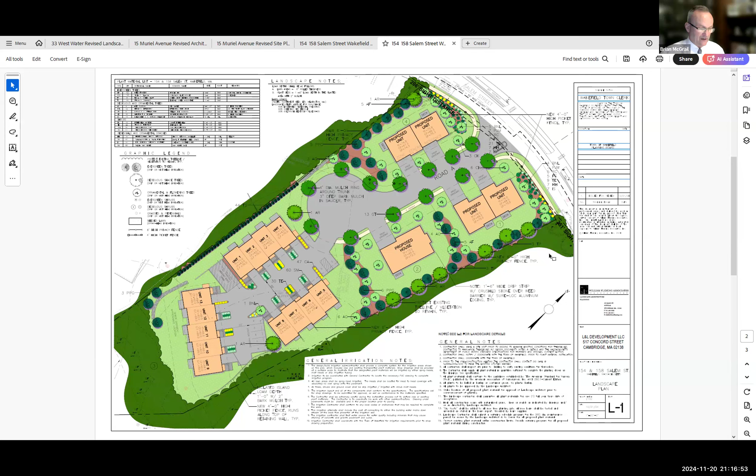So once we get a better grasp on that, we will be filing with the Conservation Commission. With that said, tonight besides my introduction of the project, we'd like to do a quick overview with Rich Williams on site civil, not a lot of detail especially as to drainage since that's still a moving part. Then Nirjus will go through the architecturals from a 30,000 foot view, if that's okay, Mr. Chair. Yep, please do. Okay, Rich, if you could take the screen and proceed.

All right, can everyone see that? Yep, you're good. Okay. And thank you, Brian. Just to repeat, I'm Rich Williams with Williams and Sparages. Our offices are in Middleton, Massachusetts, and we're quite familiar with this property. We've been working on it for 12 years or so.

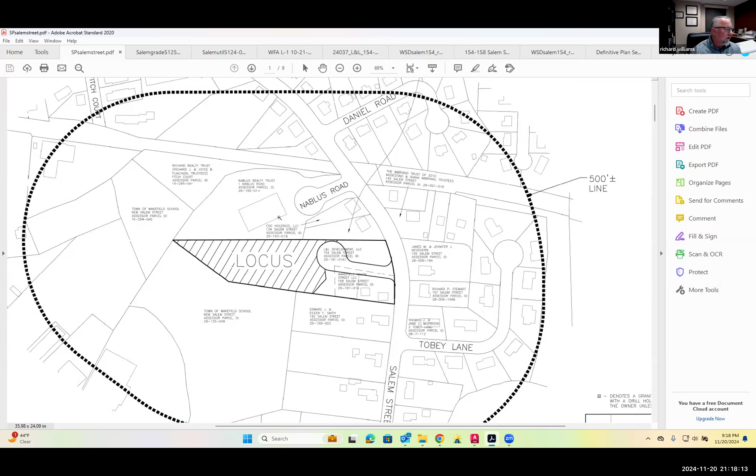Just to back out a little bit, I know Brian showed you this slide. It shows the road and the locus. I wanted to point out the location of the abutting structures to our right as you enter the road. We've got two residential structures, those are duplexes, and then going back Nablus Road is a commercial building. On the left side is a single-family residential, and those structures are up near Salem Street, a little bit away from any of the work we're doing on Lot 3 here.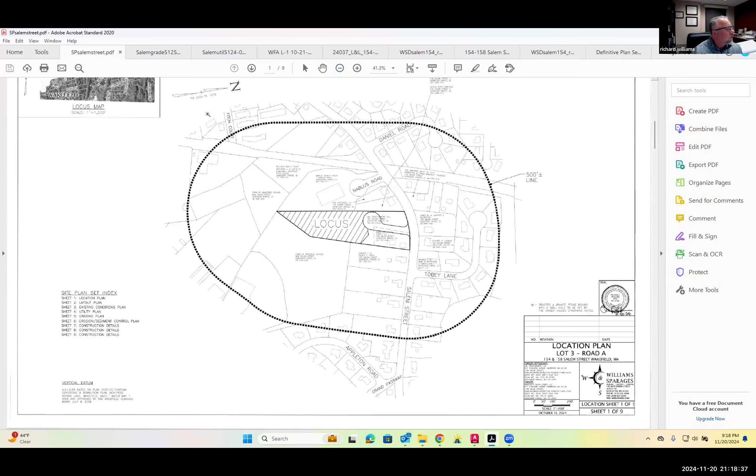You can see off the sheet to our southeast is a wetland system, and that wetland system is attached to the wetland system that also shows on the plan to the south, surrounding the upland area that includes our lot. Also of note, and Brian described the zoning so I won't go through that, but there is an existing sewer easement. There's a trunk sewer that comes down through Nablus and the abutter's property, then through our property and out to the town of Wakefield. This area here is owned by the town of Wakefield, and that sewer's been there for a long time.

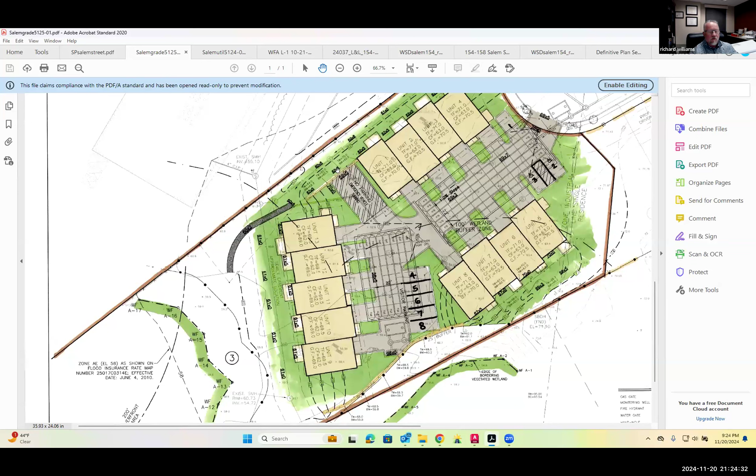For the utilities, as Brian said, the water and gas have been taken off Salem Street, so those are stubbed out, and the water will run in the road. There is a hydrant proposed in the circle, and then a water service that will serve all of these units. The water service for this bank of units 5 to 8 is in the back, and the others, 1 through 4 and 9 to 13, are in the front.

The sewer will connect to the existing trunk sewer that runs through the property, pitching from about 100 feet into the site in the new roadway, collecting the sewer in the townhouse development, and then discharging at this location in the trunk sewer.

Our drainage for this development is all handled through subsurface infiltration and stormwater detention systems. These subsurface systems provide the necessary pretreatment with the catch basin and grit tank, and then those leach into the ground and have an emergency overflow that will discharge out behind the units, and ultimately, if that overflow occurs, go to the wetland. But it's designed for the 100-year storm to accommodate it without an overflow.

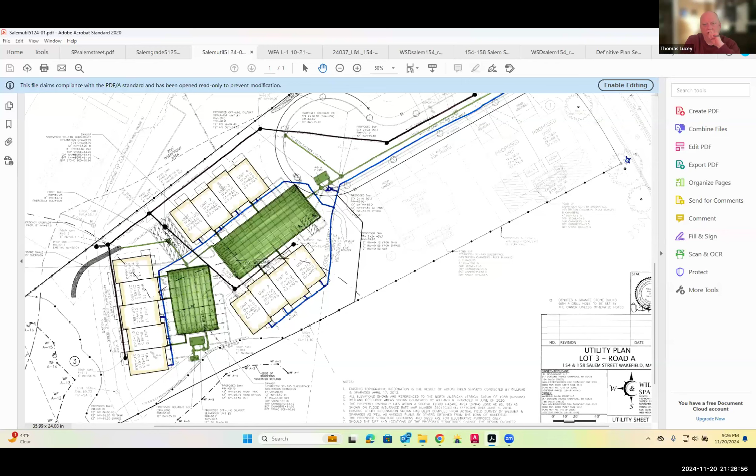Mr. Williams, can I just interrupt you here? We're trying to be at 10,000 feet. We're going to come back and do a whole site review. Sure, survey, I'm done with the utilities. I'm pretty close to being done. Yeah, you're getting in the weeds here on something we're going to cover later. Sure thing.

Then landscaping. I did not do the landscape plan, but I'll take you through it generally. Street trees are proposed as they would be on any street. But we've proposed lots of trees and shrubs, in particular for the 13 units in the back. We've got screening between the residential lots 2 and 4, which have residential structures on them. There's a mix of spruce trees and other ornamental trees that divide this from those folks. Also, along our westerly boundary, we've got a row of arborvitaes, and some other spruce trees down here, as well as a new privacy fence that will run the whole length of the property, and that occurs up behind these units as well, although that's not really part of this application. The dark green is the area that is not proposed to be altered.

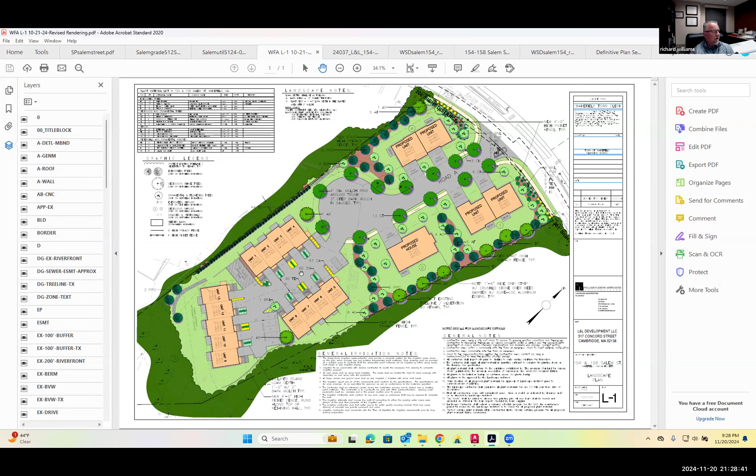Just to add one other thing, our trash pickup will be private. It's expected that everyone will keep the trash in and pull out barrels at pickup time. Yeah, we'll get into all that on operation and maintenance, if we get that far.

All right, Brian, now we're going to hand over, if we could, to Nerijus just on the architectural. While that's still fresh in people's minds, do board members have questions or comments on that, or do you just want to move on? Chip put his hand up, but I don't know if he's ready.

Yeah, I have lots of questions. First of all, we were getting into the weeds, so I appreciate you saying something. I always get concerned when we get plans that look like they've been approved, and we haven't even seen or talked about them yet. So the first thing I want to make sure people understand, that I understand, is this is a proposal. This is not a done deal. The plans seem to be way far along compared to what would normally happen on a first presentation, so for myself I just have to be reminded of that. My first comment is there's just a lot of pavement. I don't know if we can do anything about the roundabout with the driveway, but there's a lot of pavement even in amongst the units. Two things I'm not excited about: 7 and 8 foot retaining walls to jam these units inside of that. So from a site standpoint, those are two things that jump out at me, the pavement and the retaining walls.

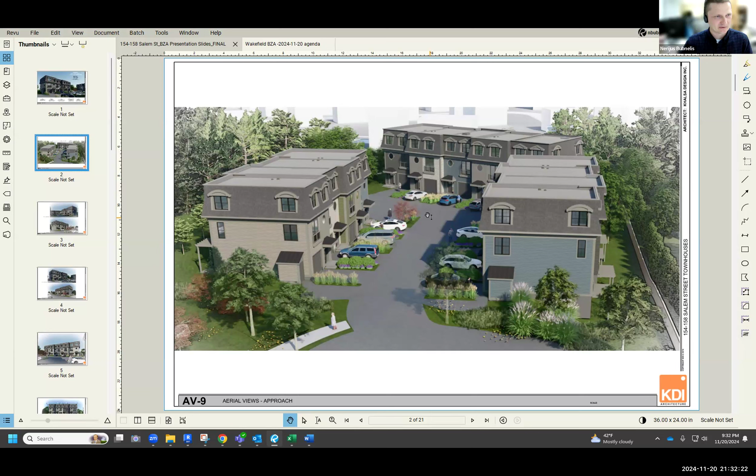So I'll pick up from where Brian started, and jump in quickly on the site and orientation, a bird's eye view of the site where you can see 2 buildings on left and right, each with 4 units, then a 5-unit building in the back. You can see each one has its own driveway and garage, with separating landscape areas in between the driveways.

So the design intent of this development was to provide each townhouse within the building with a distinctive and unique look, creating a sense of individuality while maintaining an overall cohesive aesthetic. We also wanted to visually reduce the scale of the building, and we thought we were successful by introducing the mansard style roof, which breaks up the massing horizontally.

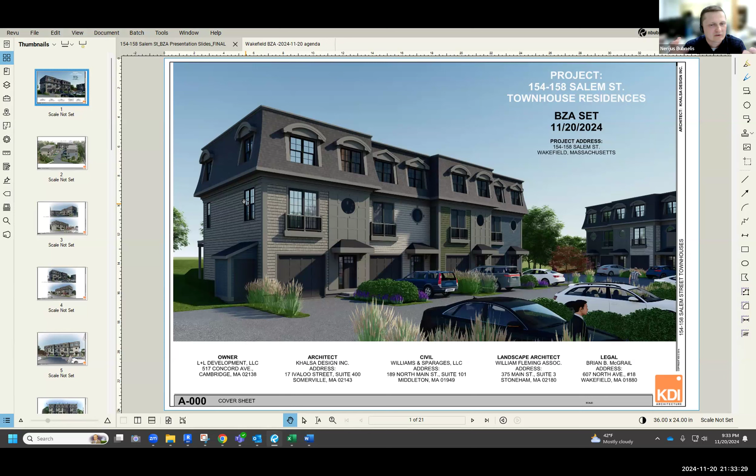And then the other thing we did, looking at the plan view, we shifted each townhouse block within each structure to break up and segment and fragment the walls and roof lines to further reduce the visual bulk.

We can go into more details on the views if you want, but I'm going to jump into materiality and other design elements. On exterior design, you can see the dominant architectural style showcases a lot of elements like a few styles of dormers, Juliet balconies, traditional doors and windows, adding some character with a round circle window for more interesting interior spaces.

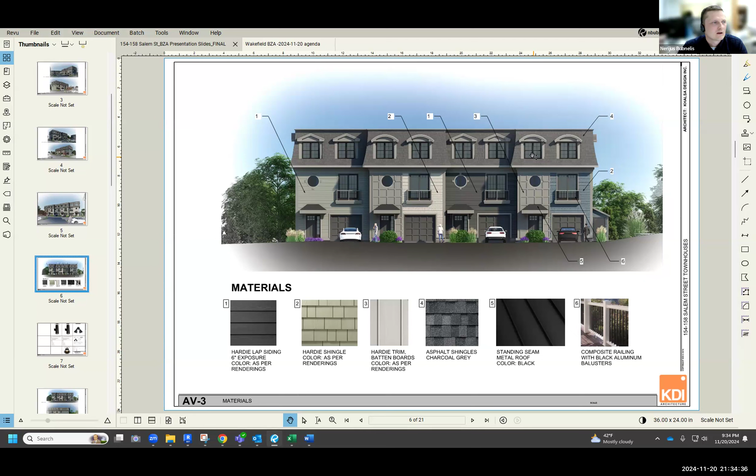In terms of materials, we're looking at low maintenance, long-lasting materials like cementitious siding. In terms of color scheme, we're looking to use organic, earth toned colors that will blend the building into the wooded area and blend in with nature. Initially we're proposing some lighting, just building lighting at this point—I'm not going to go into details.

You see the elevations of the typical building. Previously we mentioned that most of the units will be identical with a few small variations, like basements being walkouts versus having a light well for egress. So I wanted to show a few different rear elevations of the builds—buildings 1 to 4, units 1 to 4, would have a walkout basement as you see in this view.

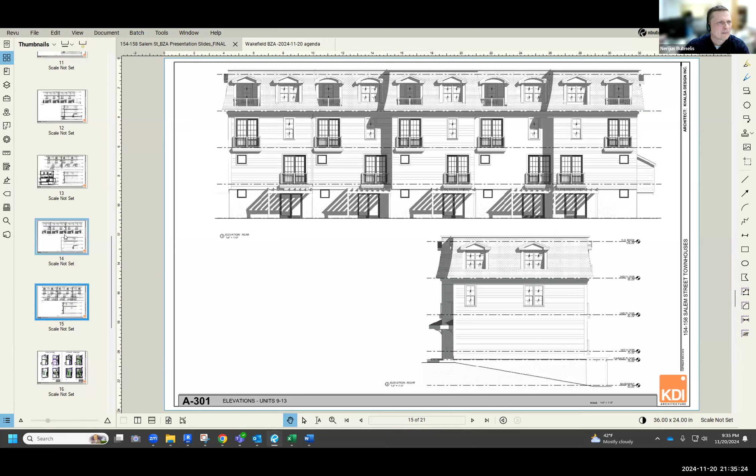Let's get to, for example, building units 9 to 13. At the top view you'll see a walkout at the intermediate level and walkout on the first floor, and light wells from the basement, intermediate, and then a walkout basement unit, just because of the grading of the site.

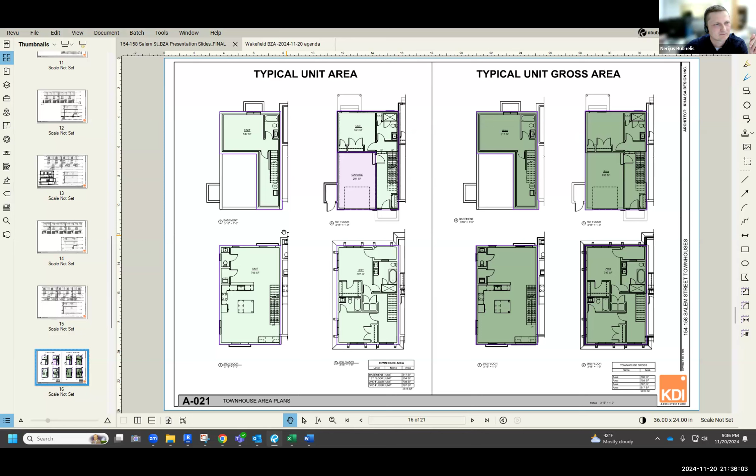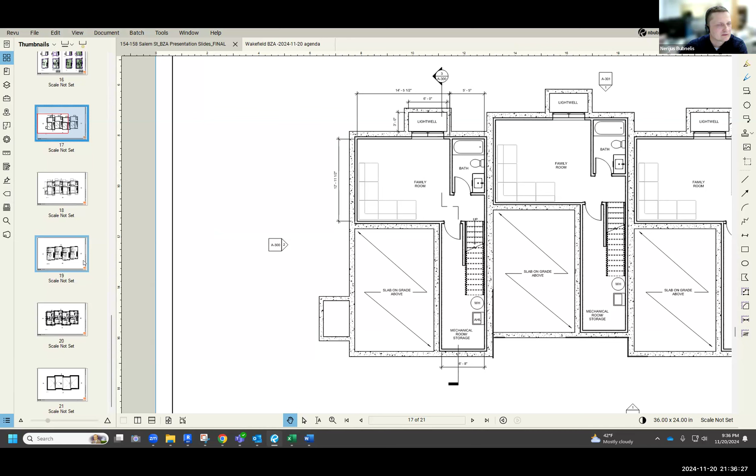Quickly on the areas of the building, as previously mentioned, there will be 3 bedroom, 4.5 bathroom units, approximately 2,600 square feet each, plus or minus 300 square feet garage. I'll quickly jump through the typical plan: the basement with stairs on one side, the family room with either a walkout or light well, the bathroom for the floor, and mechanicals towards the street, slab on grade above.

Going up the main floor, you see the garage on the left, the door to the unit, same the front door to the outside. Stairs will lead you down to the basement from the front entry, and then up to the upper floors in the back.

On this floor we have one bedroom with a full bathroom. If you go up, you have sort of an open concept floor plan with the living room facing towards the back, and kitchen dining towards the front. There's a bathroom on the floor.

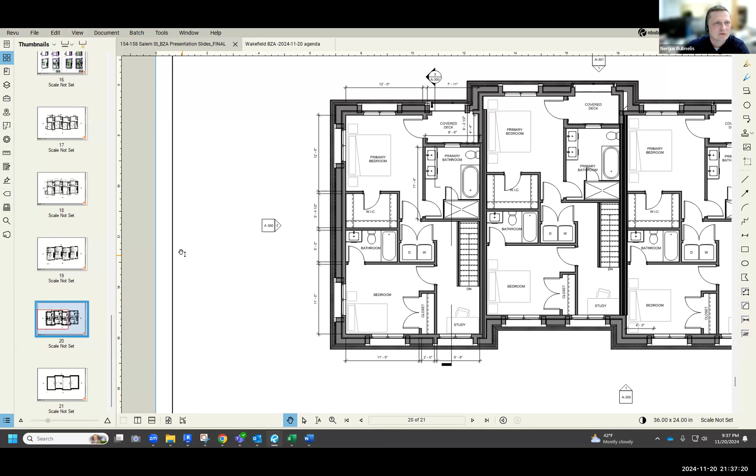If you go up to the upper floor, you see these oversized windows within the dormers. There will be two variations - the corner or back units would have a little bit more windows. On that floor you'll have the primary bedroom and bathroom with a covered recessed deck, as you see here at the top, and then another bedroom, full bathroom, washer dryer on that floor, and a small study area.

Flat roof, not a real mansard, but a flat roof at the top with a mansard look from the side.

And from here, I'll end my presentation and open for comments and questions. Thank you.

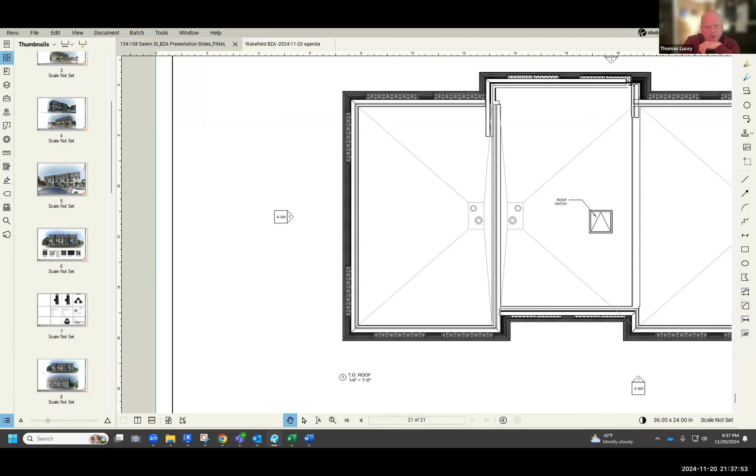Thank you. Okay, board members, comments, questions? Anybody? Too dense, maybe everybody's too timid. No, I'll take a stab.

I feel like the project so far - I like it. I know Chip mentioned it was kind of big, I don't know, maybe it was just the way some of the pictures looked, they looked kind of tall. The mansard - I know you're trying to make the mansard roof look like it was less than 3 floors, but it actually looks more than 3 floors, even though it's only 3 floors. So something to think about. Maybe cut it down to 2.

I know you lose a lot of the ground space with the garage, but 3 floors in that area, 13 units, it starts to get overwhelming. So that was my original comment.

Okay, thank you, Joe. Kasumi?

I think the building may be a little bit too narrow, because you're explaining each unit is going to have its own trash barrel, and then you're going to pull those out. So I assume everybody's going to put those in the garage, but looking at the width of the building, you almost have to move both of your cars out to pull your trash bins out. So you might want to think about that. That was my initial comment.